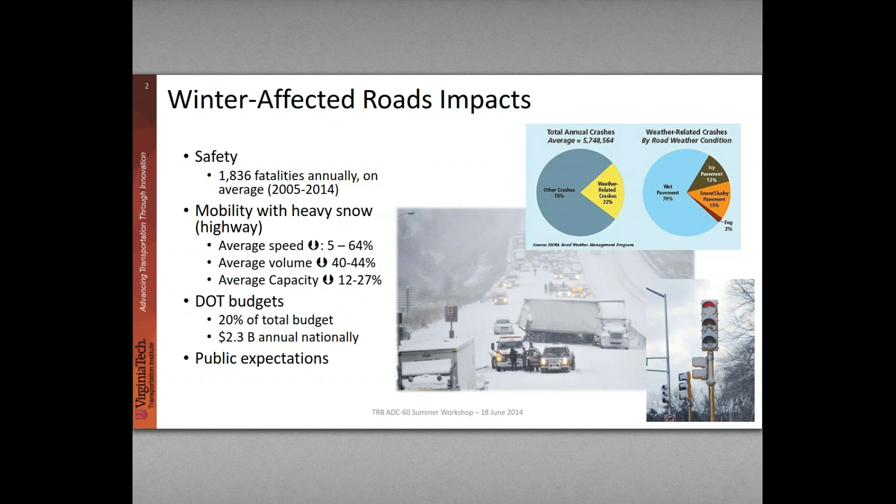Not only do the roads get iced up, but we're starting to see impacts on vehicles. Since we've converted over to LED signal lights in a lot of places, they no longer warm up to the temperature where the ice will melt off, and so we start to see this. This is kind of an interesting phenomenon too, because as you hear more and more about autonomous vehicles, most of them still rely upon camera view of that signal to determine whether or not they can go at an intersection. So there's a lot of ways that winter weather impacts transportation.

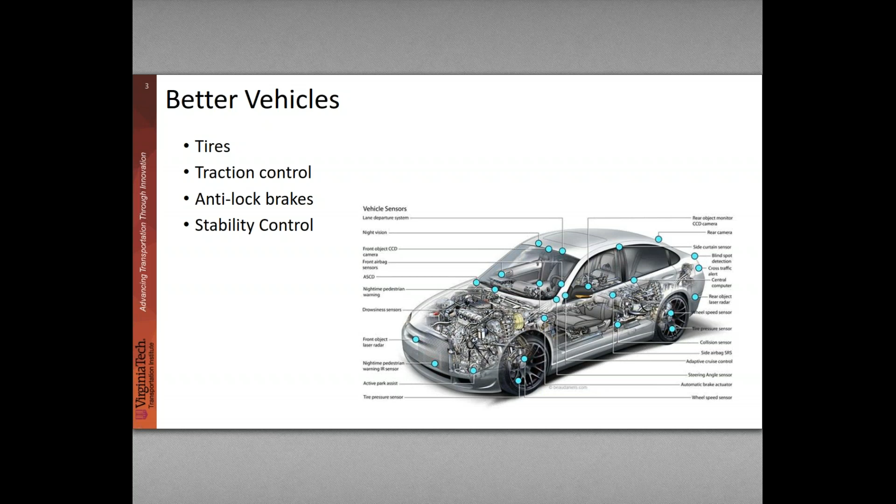Some of the ways we're dealing with it, and some of the reasons things are actually better out there than they used to be, is that vehicles have gotten better. We don't talk about that often. We've got a lot better tires than we used to, and some really advanced systems on cars that work well. I know the car I drive actually has 10 different modes that the system can ride in. In the wintertime, it's all-wheel drive, and you can put it in different modes. Anti-lock brakes, stability control, and traction control - all these things have made driving in winter conditions better. So maybe the level of service doesn't need to be quite as high as it would be for cars without these advances to handle them.

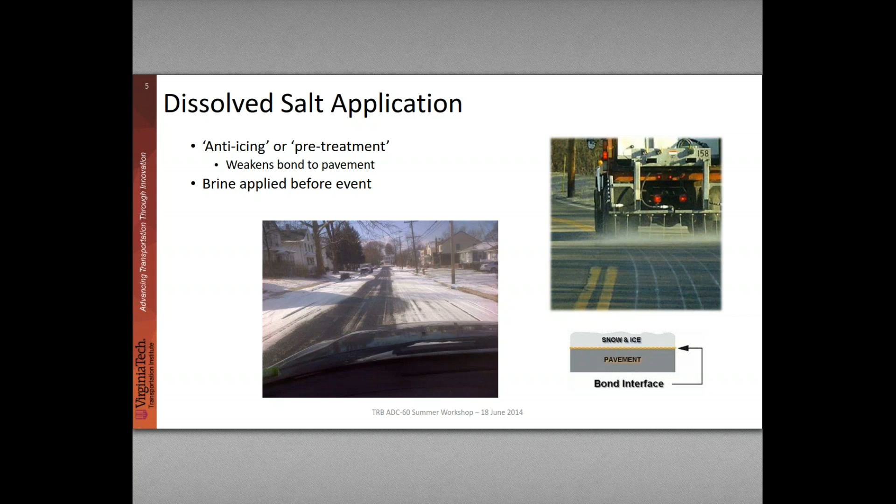We'll talk about that - I know Wilf's going to talk about some of this stuff later on. Plowing is one way to clean the roads off. Primarily what I want to talk about today is salt. As Marion was talking about earlier, they brine the roads - you'll see the stripes on the road a lot of times. The primary reason you put that out there is just to prevent the snow that falls on top of it from bonding to the pavement, so that when they do come along later with the plows, it pulls off much more easily.

Primarily what I want to talk about today is granular material, specifically salts. We have sodium chloride, calcium chloride, magnesium chloride. There's also something called calcium magnesium acetate and blends, and I think Diana's going to talk about some of those alternatives in another presentation.

We also put down aggregates on the road for mechanical traction improvement. Typically that's sand; in some places they put down bigger pieces of gravel. But that's its own separate issue.

I have a friend who lives in Colorado and works out there with the DOT, and they put down primarily sand. Well, when that sand washes into the rivers and streams, it causes a lot of problems there too, because it'll completely cover the bottom of the stream and kill the life living down there, all the benthic life. So it's not free of its own problems.

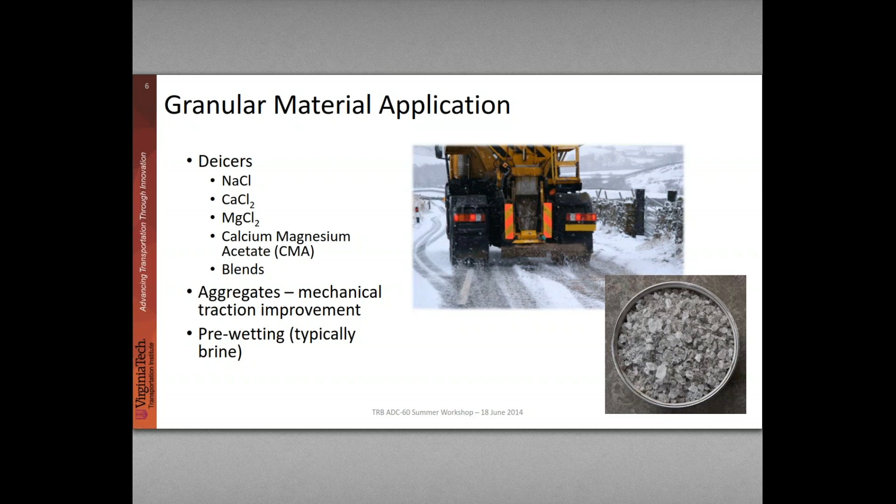And then there's something called pre-wetting. We'll talk a little about it—that's the idea that once you put this granular material, whether it's an aggregate or a salt, in the back of a truck, a lot of times they'll put a wetting agent on top of that, and it wets it literally. Typically that's brine that's put on there, and it has a couple different purposes. I'll talk a little bit about that.

So this is really the mechanics behind how salt actually removes ice, and it's pretty interesting. Ice, let's see where I want to start with this—ice is interesting. Frozen water is a really interesting thing to start with.

It's one of the few liquids out there, if not the only one, that actually expands when it freezes, when it solidifies. And ice, believe it or not, once it gets below a certain temperature, actually is not slippery. In fact, you can walk on it very easily when it's below that temperature. It's only when it's above a certain temperature that a water layer forms on top of the ice, and that's what actually allows you to ice skate, and that's why the roads are slippery.

A lot of people think it's because the pressure of the ice skate on the ice melts the ice. That's not the truth. There's been a lot of debate over the years—there are still people on both sides of the issue—but what it really comes down to is there's a little bit of a layer of water.

And the reason that's important is because when you put down a granular solid material like salt on the roadways, it needs to dissolve. And if you were putting salt down on top of another solid like ice, and it's below a certain temperature, it wouldn't dissolve.

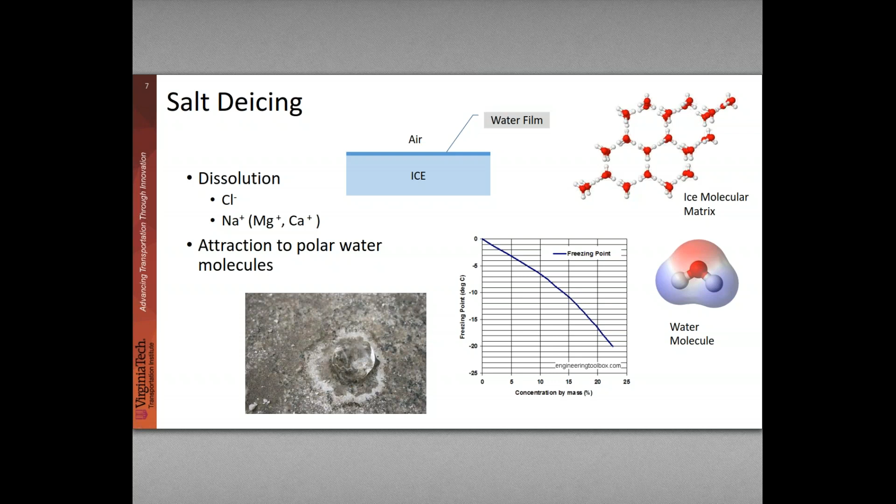Now, obviously those were good conditions. The temperature was relatively high. There was sun on the road, but it was amazing how fast it cleared the road. And it was also really embarrassing because by the time the tow truck guy got there, I looked like an idiot because that road was clear.

Phil talked about this before, some of those things as far as, so you want to use the right deicers for the right conditions. And typically that means temperature. So as we get colder, we tend to move away from sodium chloride and start using some of the alternatives like magnesium chloride and calcium chloride.

I don't think anybody needs to know the specifics about that, but that information is out there. And I think we talked about earlier, even some of the alternatives have some bad side effects, whether it's beet juice or even calcium magnesium acetate, or CMA. They both, if they get in the waterways, create a biological oxygen demand, and can result in fish kills and things like that in the waterways. So pretty much everything we put out there has some sort of negative impact on the environment.

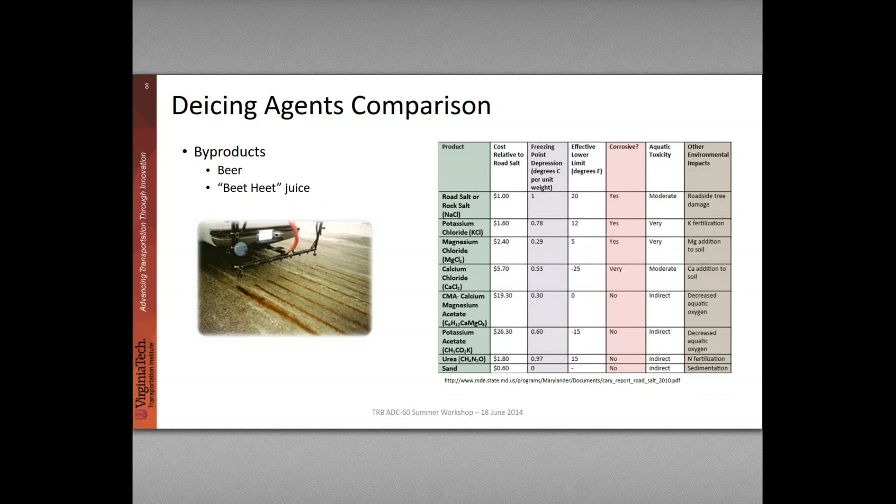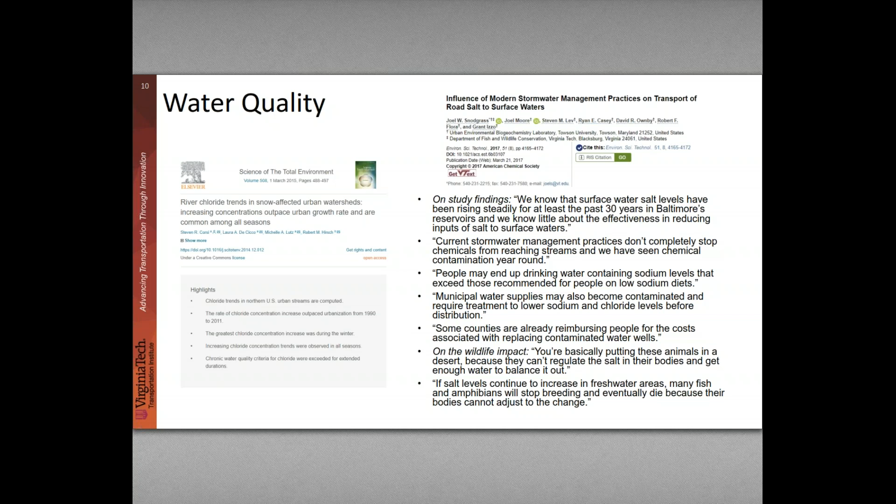And so they see the levels basically rising and rising, and that reflects what Charles talked about earlier, where we're seeing the levels just keep rising over time. Obviously, we have impacts in the natural environment, the water quality, soil quality.

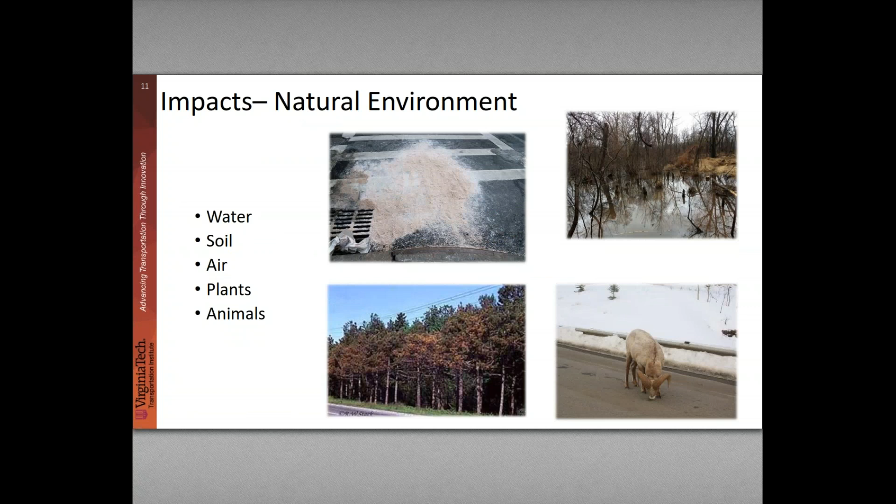Animals are actually drawn to the roadway. We do work with animal vehicle collisions. You'll see animals literally at the roadside or on the road licking up the salt because it tastes good to them and they need the nutrients. Some of the plants along the roadside, you'll see this sometimes and not know what it is, and it's actually from salt impacts. The same kind of thing for crops.

I put this on this slide because it's really a man-made environment what we're talking about here, but the impact on crops is actually fairly significant in many places. And then you see these kind of things on bridges, and there's a couple different things going on here. For one thing, rust that occurs on the steel. A lot of people think concrete's waterproof. It's not. Water and salt, for that matter, can move its way through concrete.

Once it reaches the reinforcement rod that's inside the concrete, rust forms on the rods, and it can create millions of pounds per square inch of compressive force. Concrete is not actually very strong in tension, so it falls apart, and it pushes that concrete off. That's one type of spalling that occurs.

There's also freeze-thaw spalling that occurs where water works its way down into cracks on the pavement or wherever the structure is, and when that freezes, it creates a lot of pressure and creates spalling.

And there's a third method of spalling. That's where salt gets into the surface of the concrete or other types of pavements, and when it gets down and crystallizes, the crystals expand and can actually create spalling. So there's a lot of different mechanisms at work.

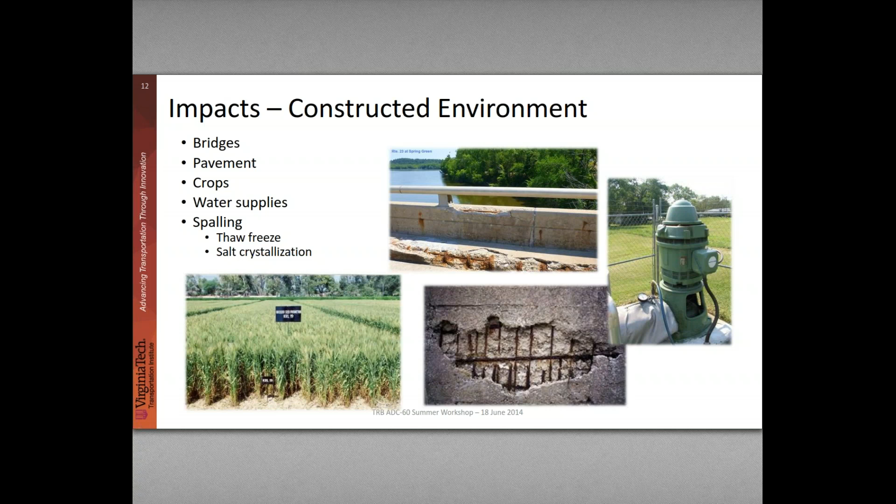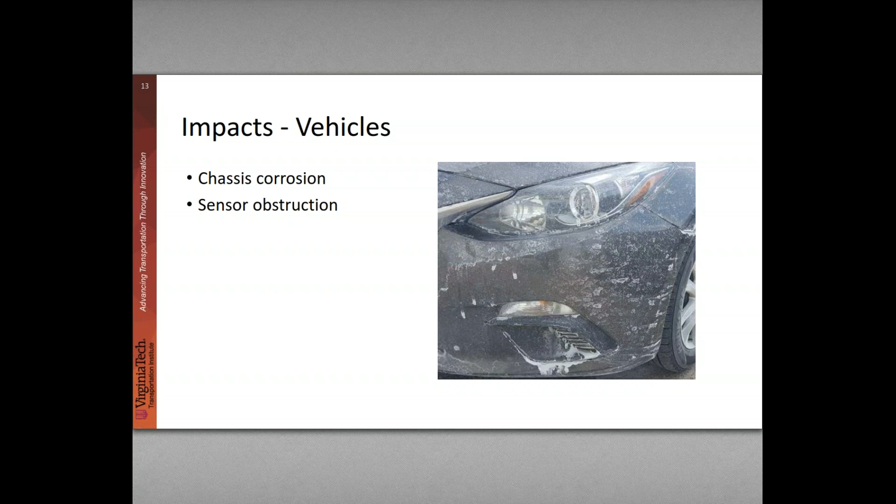This is something we really haven't talked about too much, and I alluded to it earlier, but a lot of the new vehicles out there now use a lot of different sensors for things: cameras, LiDAR, ultrasonic, different types of sensors, and they rely upon those for navigation in the environment. As we see, this is salt on the outside of a vehicle, and you can see if we obscure those sensors with salt that's built up on the outside, that's going to adversely impact the performance of those vehicles.

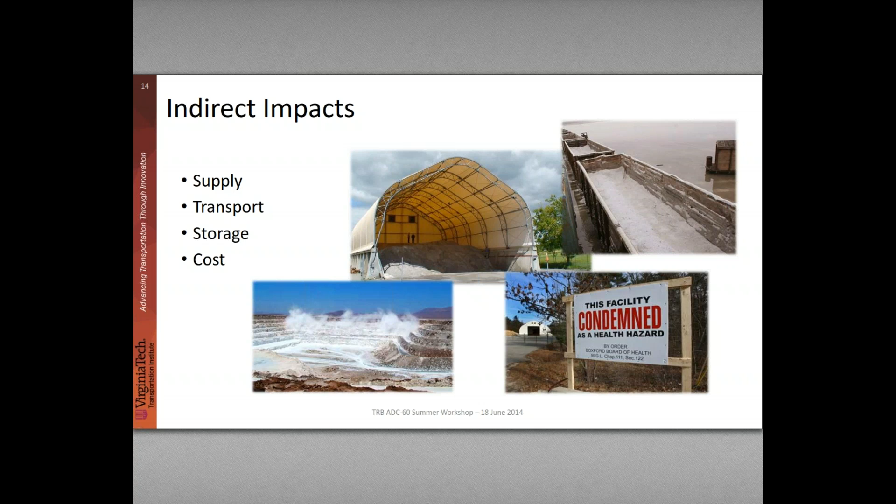Now I'm going to get into some of the technology solutions that I see out there.

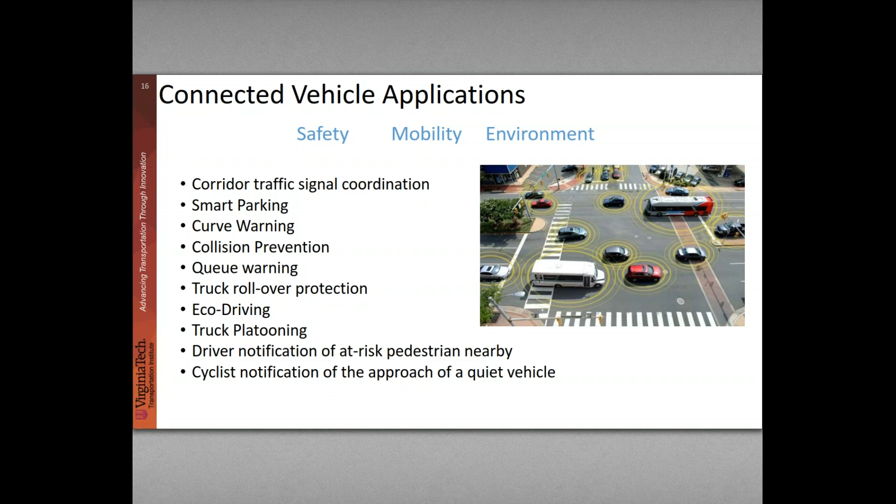One of the major things we see as an opportunity for improving winter maintenance is connectivity between vehicles and other vehicles, and between vehicles and the roadside, or the back office. The DOT has this program called Connected Vehicle, where every car is wirelessly connected to every other car with communications. It's a great program with all these different applications, but it also helps with some of the other things we want to do.

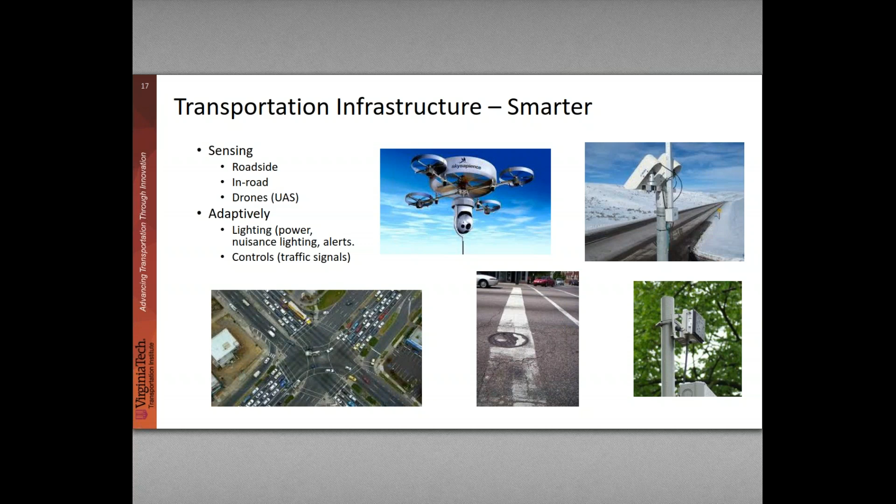If we have that sort of connectivity we hope to have in the future, right now we're looking at two different ways of doing that. One, something called dedicated short range communication, which has been out there but not in many places right now. VDOT does have a nice connected vehicle test bed up in the Fairfax area, with about 50 different communication nodes. The other way is, of course, cellular, and as 5G cellular gets rolled out, that's going to have a big impact on this kind of connectivity.

It can actually monitor the pavement temperature. There are thermometers on the truck, and they can monitor the operation of the windshield wipers, solar radiation, and other weather conditions needed to better predict the weather. These are on the safety service patrol vehicles VDOT had on Interstate 81, driving that highway constantly, helping people out and taking care of hazards on the road. This is a really good way of monitoring pavement conditions.

When you're looking at pavement, air temperature doesn't matter so much. What you care about is what's on the roadway, so you really need to know the pavement temperature. That has a big impact on what's going to accumulate, and it's a critical piece of information we're not getting any other way right now.

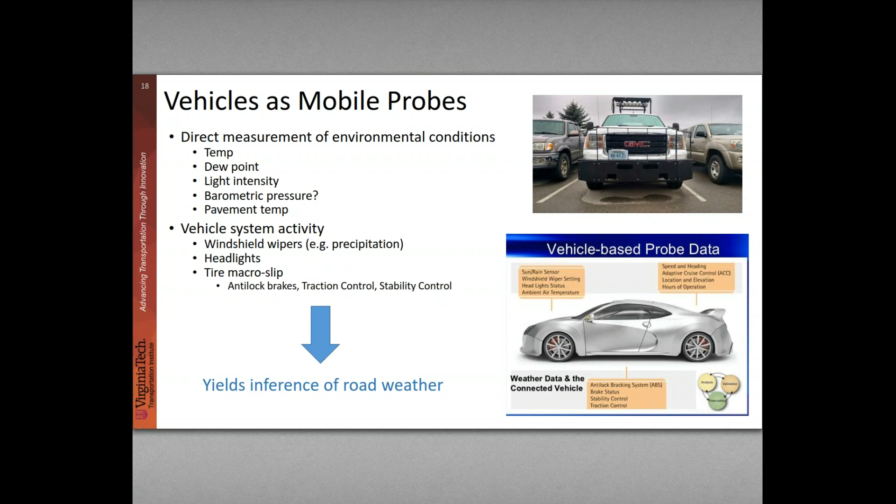This is pretty much what I just talked about, so I'll skip through that. This is also interesting.

So what we were looking at is, if we encourage certain plants to grow along the roadside - called halophytic plants - the salt that runs off the roadway concentrates in the tops of the plants. If we harvest those and make fuel oil, or biofuel, through the thermochemical conversion process, we can put the biofuel back into the trucks to reuse it. And the biochar, what we were looking at, is reapplying that back to the roadways, as it mechanically improves traction but also chemically reacts with the ice on the roadway and melts it. So in effect, we were creating a recycling of the salt that's applied to the roads.

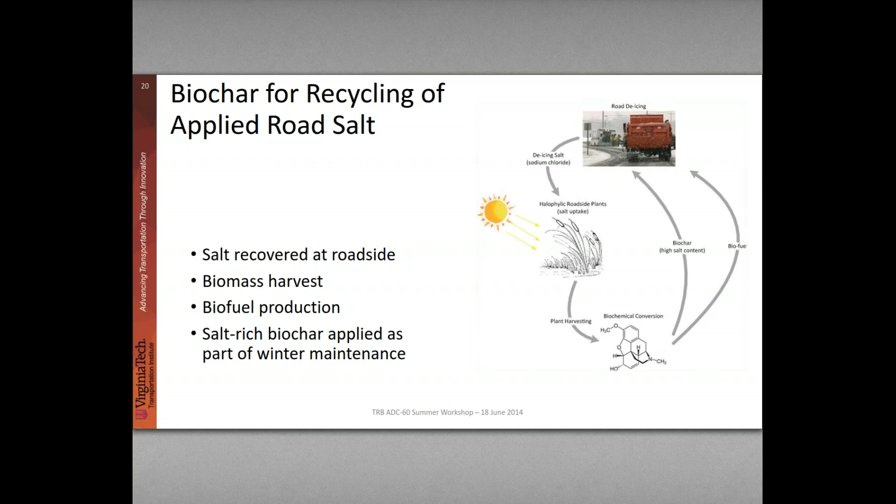Have you already waved at me? Okay, I'll try to watch, but no promises.

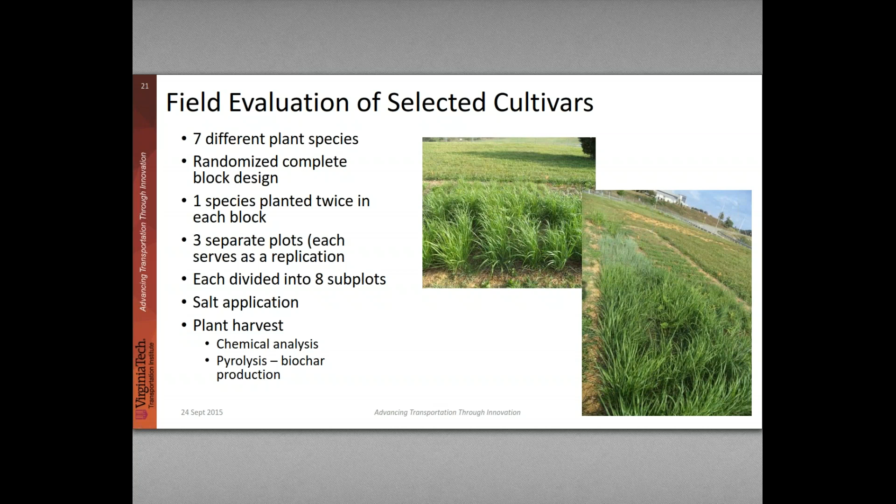We actually did some work. One of the main parts of the work we did with the horticulture department at Virginia Tech was looking at different plants and which ones were really good at taking up the salt in their tissues while growing at the right time of year. That's a problem too, because when the salts come off the road isn't necessarily the best time for plants to grow. So we did some work with that, and I think that's all I had to talk about.